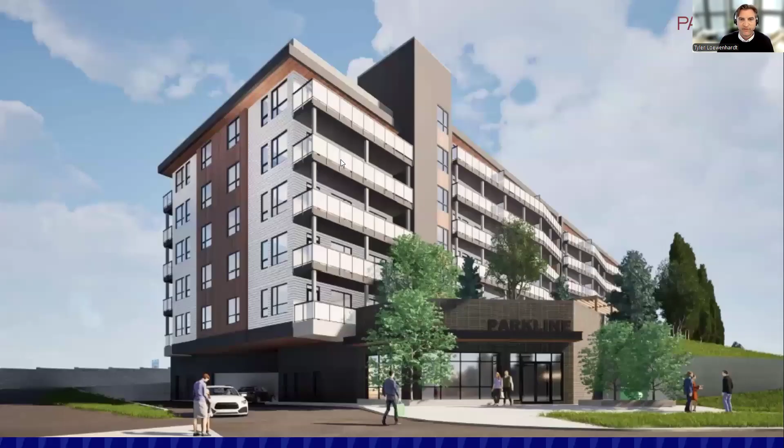So now we're getting a little bit easier to understand the building in some 3D perspectives. So this is from the corner of the internal Parkline roadway, looking directly at the main entry. So here you're starting to see some of that landscape and how the landscape on the upper amenity deck and the trees along the buffer to the next parcel will add some softness to the building at the main entry.

You're starting to see a little bit more of the brick and the canopy and the glazing of the main entry. So right at that corner, as you're driving in from either the east facing west or from the north facing south, the main entry will kind of visually anchor from our internal roadway as we approach.

You can also see then how the parkade entry is kind of tucked underneath the building. On there, you're starting to see some of the materials in terms of the wood paneling and wood soffits on the architectural features of the wrap.

On the ends, we have square balconies, but you can see through the length of the middle of the building, our balconies kind of zigzag in a sawtooth in and out along there.

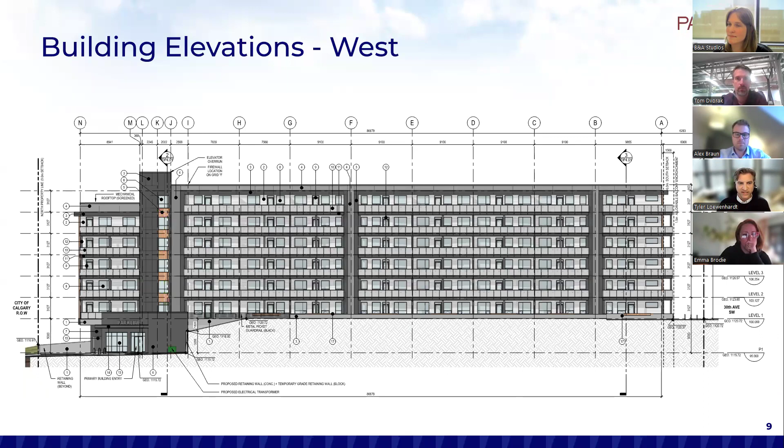There's actually a little bit more color to it. Inside the dark charcoal wraps that wrap each section of the balcony is a wood soffit and interior side panel. So that wood soffit that runs along there actually runs down the side of some vertical fins that project from the building.

We're also using a glass panel rail system with an undulation in it. So as the light moves across the sky, those glass railings at different angles will read very differently at different times of the day—one side will have a bit of reflection on the glass, while the other side will feel more clear.

As noted, this is the first pass at the DP application. We anticipate comments from the planning and urban design departments, who will give design feedback as well.

So the west elevation drawing can sometimes be a little misleading, but we are looking to create an interesting architectural building. In choosing the material color palette, we wanted to add some wood elements for warmth, but we wanted a more neutral palette rather than trying to be a giant beacon with bright colors all over. We wanted to fit within the context of the community.

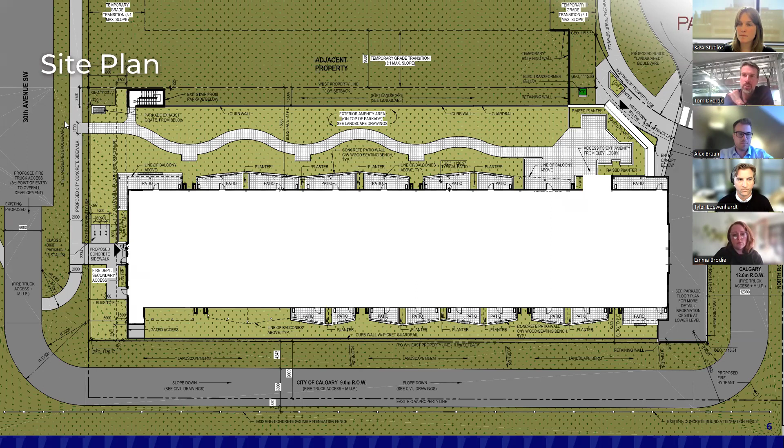The exact placement of those trees will probably come as part of city feedback. There's a balance between a desire for tree density and canopy versus good sight lines and not blocking entrances, particularly a secondary fire access into the building, so they'll want to maintain visibility. But there absolutely is an intent to plant trees in this green strip between the existing curb and the new sidewalk. Sorry, Tom, I was focusing just on the development site, but you've covered the off-sites.

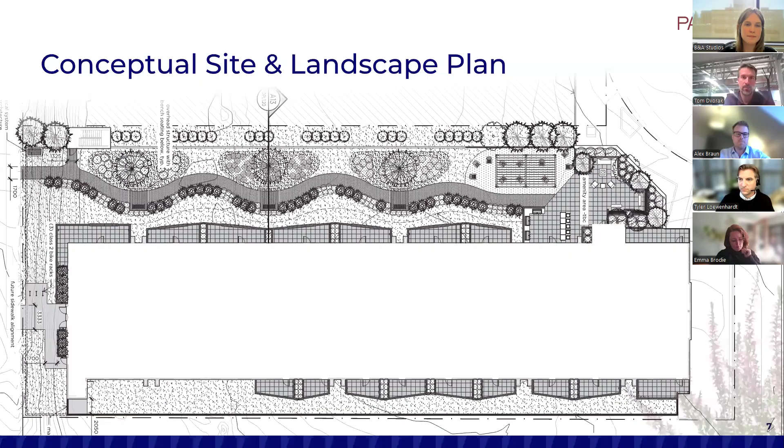Transportation, let me flip back to the pedestrian overpass and the potential 33rd upgrades. Yes, so I mentioned other opportunities. These were, what is an opportunity versus a required upgrade? These are just elements our traffic engineer flagged as things probably related to a regional level of investment or upgrade, not related to a single application but more related to build out overall. In this case, the Westbrook local area plan, or the West Elbow local area plan across Crowchild.

There is a city aspirational guideline that along skeletal roads such as Crowchild Trail, there should be an opportunity for pedestrians and cyclists to cross roughly every 300 or 400 meters. The distance between 26th Ave and 33rd is roughly double that, so somewhere at the midpoint, on a long enough time scale of build out and evolution of the city, there's probably a desire for that.

And if you go from 26th Ave, the old St. Charles School to the north has a pedestrian overpass in front of it before you get to 17th Ave. And if you go further south down Crowchild from 33rd towards Currie Barracks, Garrison Woods, you do see some extra density of pedestrian and cycling crossings in addition to the vehicular crossings. So that was just identified as a policy piece for pretty long-term planning, but not intended to be part of this project.

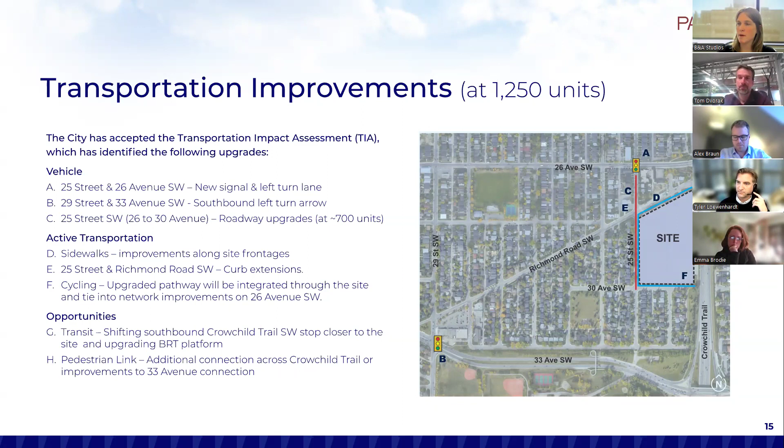Thanks, Tom. I'm going to combine two questions that popped up regarding design feedback. Tyler, coming to you, and then after that we have quite a few good questions about the general timeline of construction. Lori Kennedy is asking, could you consider curving the corners of the balconies? And another question came in generally asking, are Minto and Zeidler open to receiving design feedback from community members, or only from the city? Perhaps we can discuss how feedback is received.

Absolutely, we always say that all feedback is welcome, and a good idea is a good idea no matter where it comes from. We always take those into consideration as designers and architects. We're not just designing a building for Minto and the ultimate residents of this building - ultimately buildings exist in public space. So we do take into consideration design comments from the community. Absolutely is the short answer for accepting public feedback.

Specifically on curving the corners of the balcony - a very interesting idea. This is a wood construction building, and as such, wood doesn't like to curve very much. Not impossible, but it becomes technically and financially quite difficult to do. But a very interesting consideration to add a little bit of differentiation to the building. We appreciate all feedback on that.

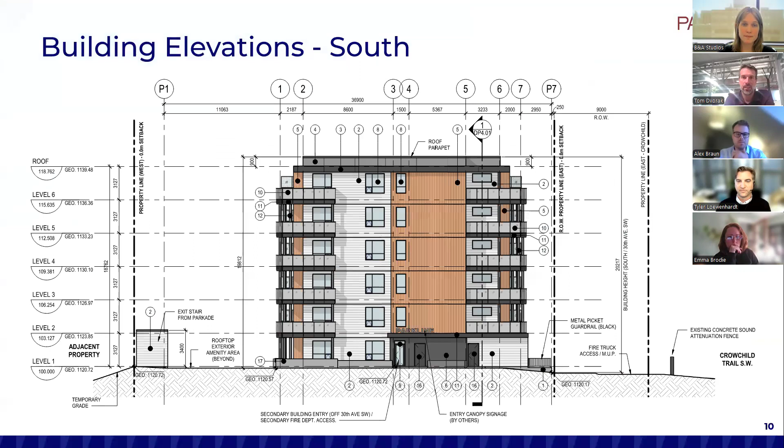Great question. I'll start with timeline first and roll in some broader timeline elements. Those familiar with the site will know there's activity underway right now. We commenced decommissioning of the existing structures late last year, so that part of the project is well underway. We're happy to share that all the hazardous material abatement was completed earlier this spring - a lot of the negative air pressure machines and hazardous material handling was completed months ago, so that phase is complete. The balance of demolition is well underway. We previously shared that we expect that to complete this summer, and that remains the case.

There are other layers of design work, engineering reviews and approvals that need to get underway before any home building can begin on the site. A lot of that engineering work and planning is currently underway, and there'll be a host of other submissions into the city in the coming months for their review. I think the earliest we'd expect to commence any of that work would be late this fall. Some of that work is very seasonal, particularly when dealing with water - there's the nature of soil conditions and proper testing. It's seasonal work, so that's something for later this year or more likely next.

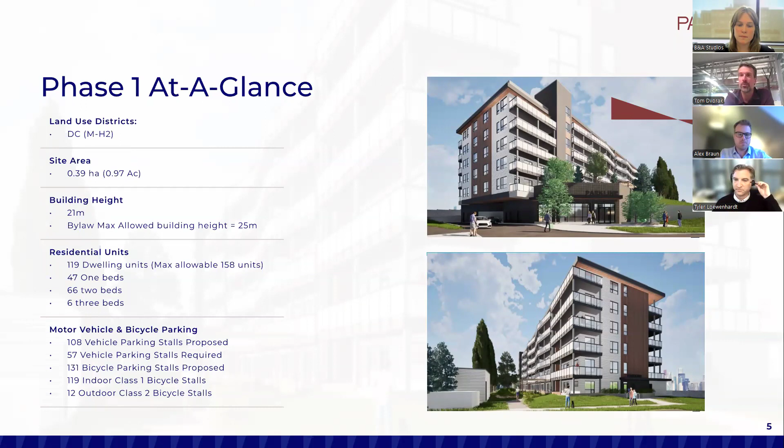We would also try to colorize these and show the depth of materials, as well as give first person perspectives rather than just, as Tyler mentioned, some of the more academic, technical flat views or even aerials. Going back to this, it looks exciting, but this is not the way most of us will experience the site day to day, even on approach to YYC.

I think for the overall massing, we'll probably be seeing this visual a lot with a bunch of push and pull to it as we evolve through phases. But in terms of visuals available, it'll be consistent with the detail you're seeing as part of this DP application.

Someone asked, have we considered how much traffic noise will be reflected from Crowchild back into the community on the west side? Tyler, do you want to speak to that?

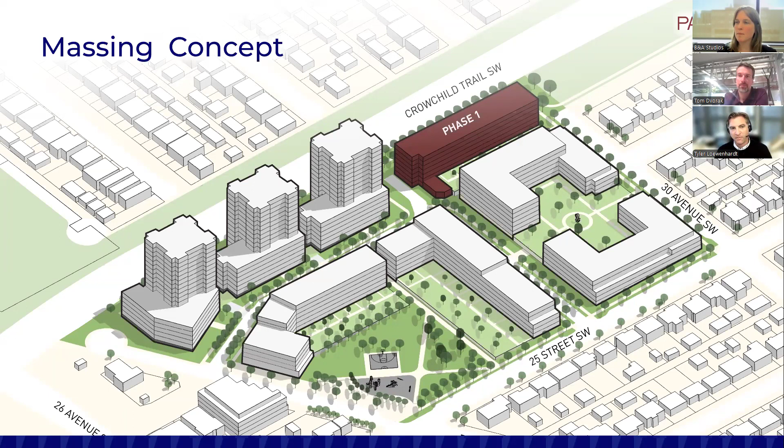Sure. At this point, the city has not required any traffic noise impact studies for this development. However, before I became an architect, I was actually pursuing a degree in physics. An interesting thing about sound waves, and waves in particular, is that we've created undulating balconies that go in and out and create angles that actually will dissipate noise. If it was just one big flat wall with no balconies, that would be the worst case scenario. Like if you've ever stood inside a big empty hard room, it echoes like crazy.

As soon as you put more things in that room, it dampens the sound. So the angled balconies and breaking up the facade will help dissipate some of that reflected noise. But that's my understanding of the science, we haven't actually been required to provide that from the city. The overall width of Crowchild and the sound attenuation fences that exist mean we don't anticipate that these new buildings will all of a sudden create excessive noise for that existing community to the west.

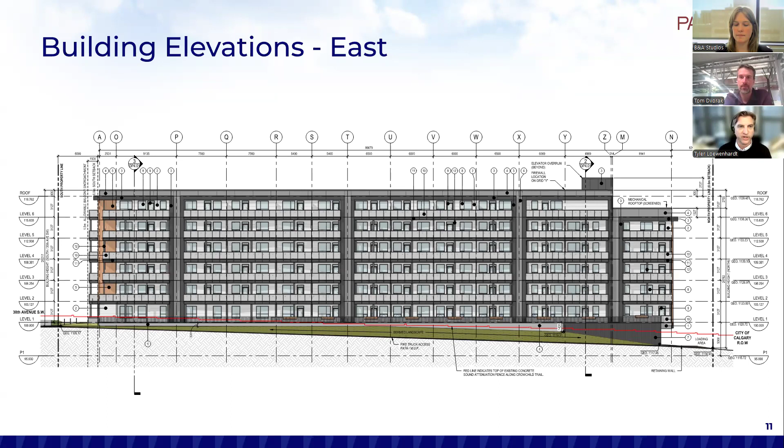Great point, thanks Tom.